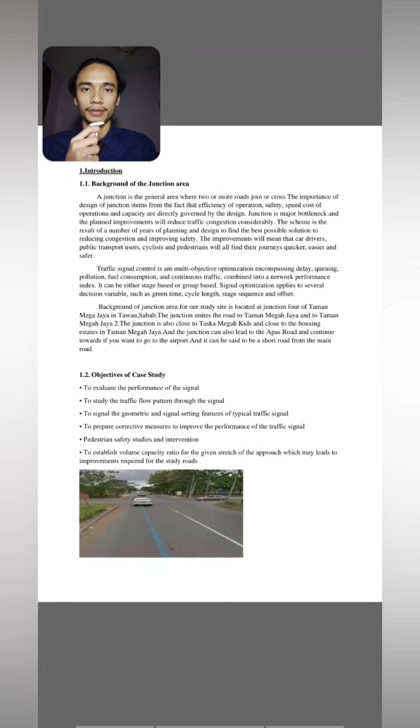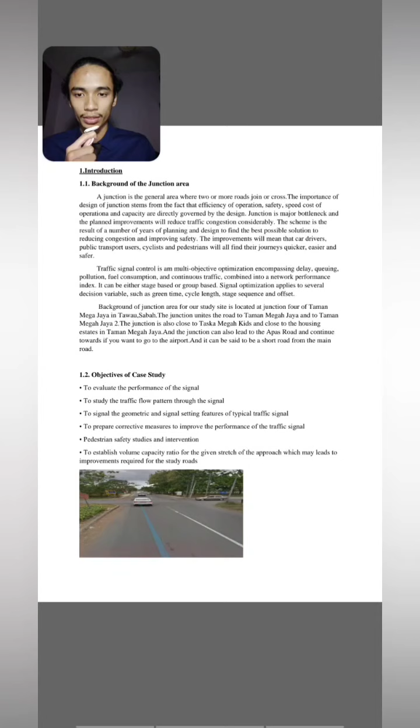Number 1.2, objectives of case study. There are 6 objectives: Number 1, to evaluate the performance of the signal. Number 2, to study the traffic flow pattern through the signal. Number 3, to signal the geometric and signal setting features of typical traffic signal. Number 4, to prepare corrective measures to improve the performance of the traffic signal. Number 5, pedestrian safety studies and intervention. Number 6, to establish volume capacity ratio for the given stretch of the approach which may lead to improvements required for the study roads.

As you can see right here, these are the pictures of the junction area that we chose. We got this picture from Google Maps.

Next, I'll be talking about literature review. Number 2.1, problem facing at the junction. The most common problem that the junction faces is road accidents. The problem faced at our study site, junction 4 of Taman Megah Jaya Tawau, is because the road is too narrow, and this can cause accidents if there is heavy rain and the road becomes slippery.

This causes cars to collide with each other if the driver did not have enough time to press the brake pedal, because the road becomes slippery and too narrow to dodge. So whenever there is heavy rain, due to the road being too narrow, accidents may occur.

Number 2.2, list the factors causing accidents at the study area. There are 5 factors. Number 1, human factors or personal error. Human factors mean it is caused by the human itself or the driver, such as distraction - he or she being distracted by mobile phone while driving, which might cause an accident. Number 2, deficient maintenance - lack of maintenance by the JKR at Tawau.

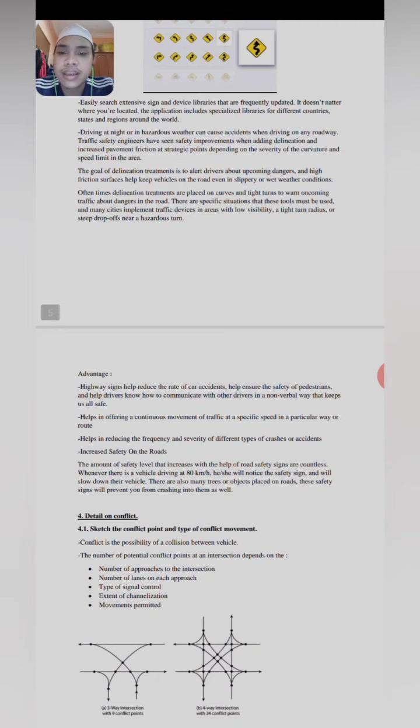The advantage is that highway signs help reduce the rate of car accidents, help ensure the safety of pedestrians, and help drivers communicate with other drivers in a non-verbal way that keeps everyone safe. They help in offering a continuous movement of traffic at a specified speed in a particular route, and help in reducing the frequency and severity of different types of crashes or accidents.

The last point is increased safety on the roads. The amount of safety increases with the help of road safety signs. Whenever a vehicle is driving at 80 km per hour, the driver will notice the safety sign and slow down their vehicle. There are also many trees or objects placed near roads, and this safety sign will prevent drivers from crashing into them as well.

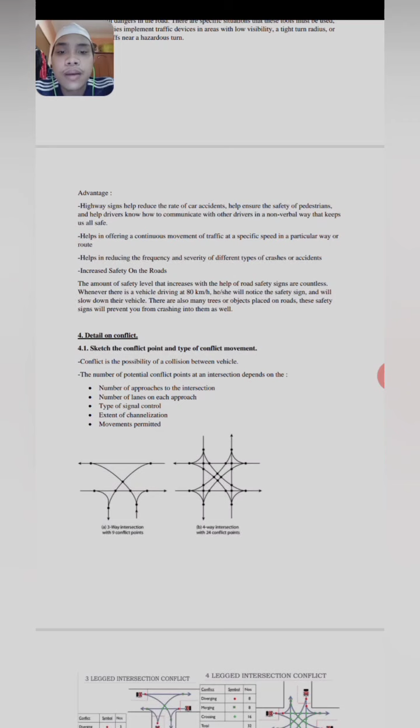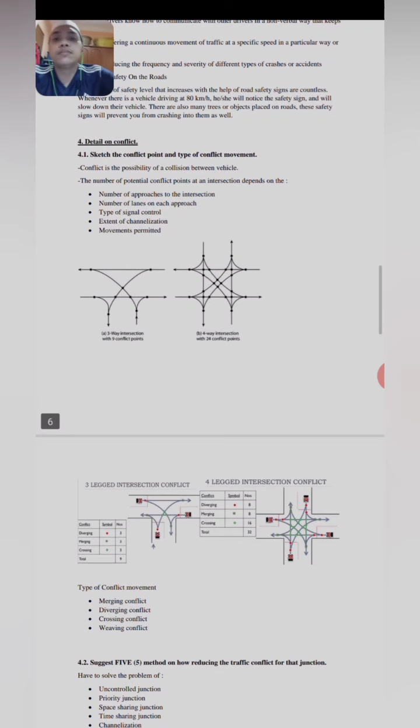Now I will talk about the detail on conflict, number 4.1. Sketch the conflict point and type of conflict movement. Conflict is the possibility of a collision between vehicles.

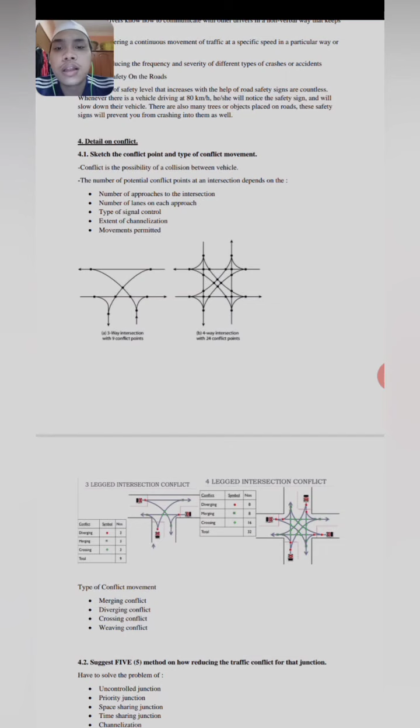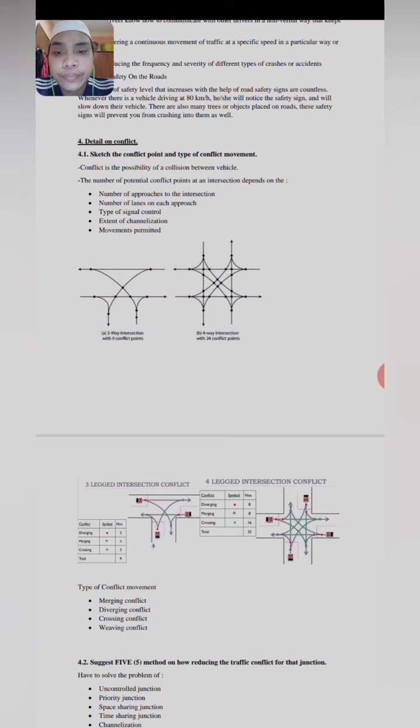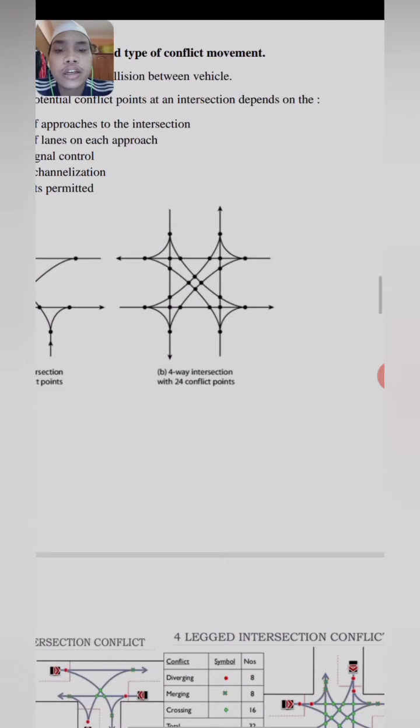The number of potential conflict points at an intersection depends on: 1, number of approaches to the intersection; 2, number of lanes on each approach; 3, type of signal control; 4, extent of channelization; and the last point, movements permitted. You can see in diagram A, a 3-way intersection with 9 conflict points, and in diagram B, a 4-way intersection with 24 conflict points.

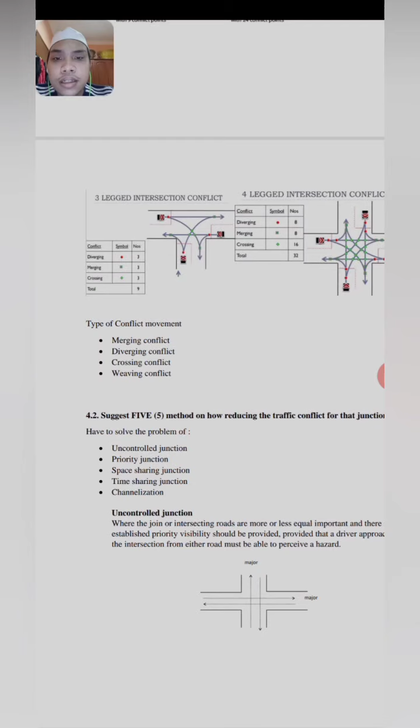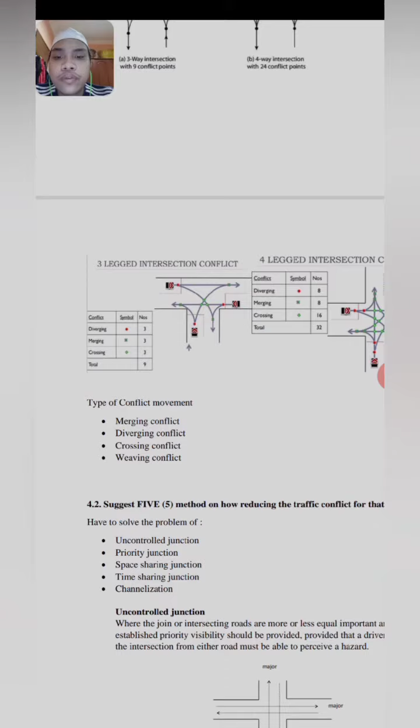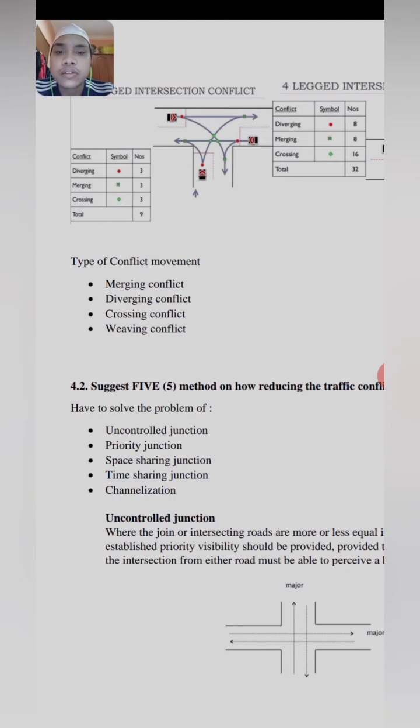You can see the examples here. Now, the types of conflict movement: merging conflict, diverging conflict, crossing conflict, and weaving conflict. These are the 4 types of conflict movement.

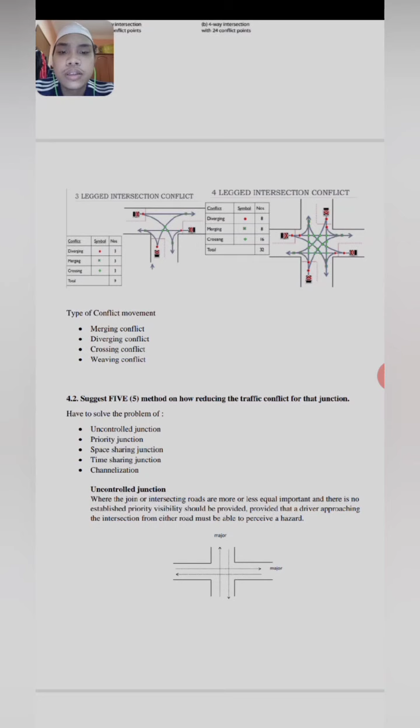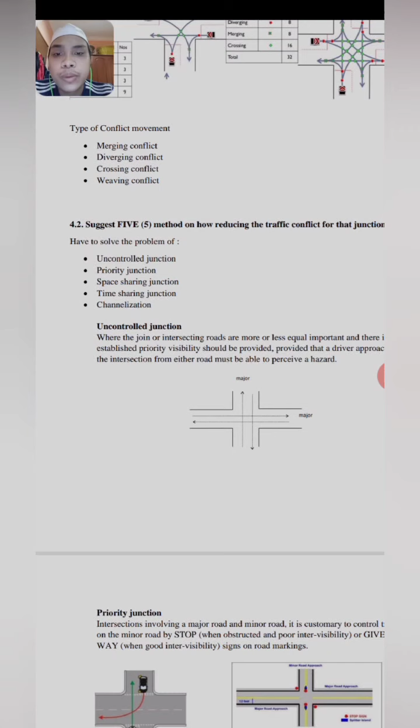4.2. Suggest 5 methods on how to reduce traffic conflict for the junction. We have to solve the problem of: 1, uncontrolled junction; 2, priority junction; 3, space sharing junction; 4, time sharing junction; and the last point, channelization.

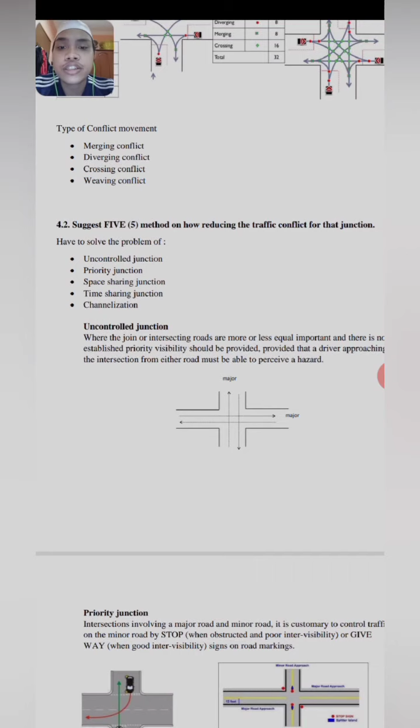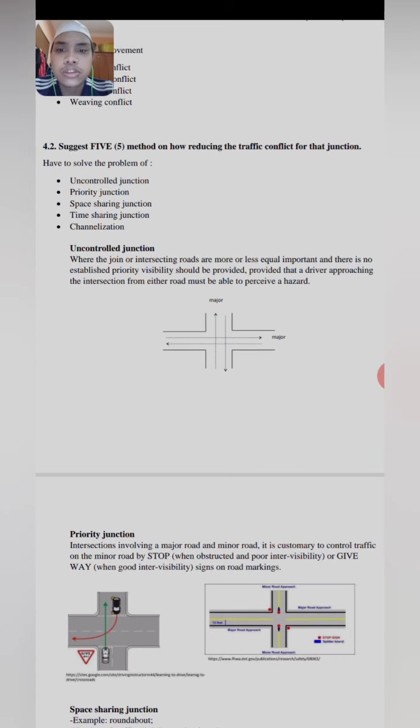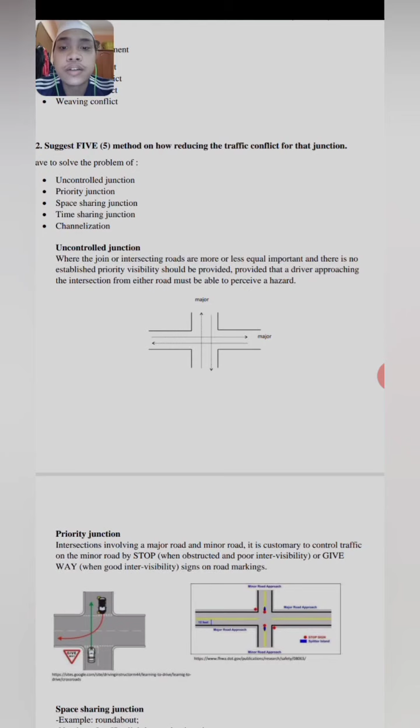Uncontrolled junction is where the joining or intersecting roads are more or less of equal importance and there is no established priority. Visibility should be provided so that a driver approaching the intersection from either road is able to perceive a hazard.

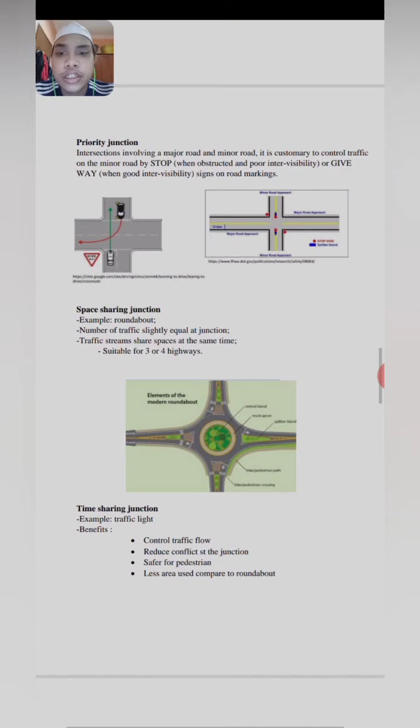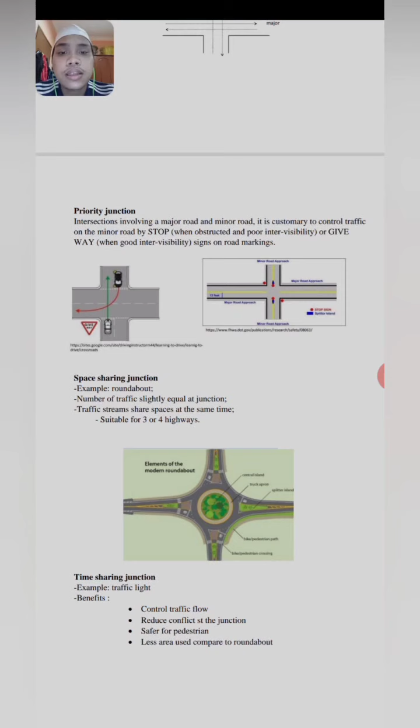Now we'll talk about priority junction. This is an intersection involving a major road and a minor road. It is customary to control traffic on the minor road by stop signs when visibility is obstructed and poor, or give way signs when intervisibility is good, using signs or road markings. These are examples of priority junctions, as you can see in these pictures.

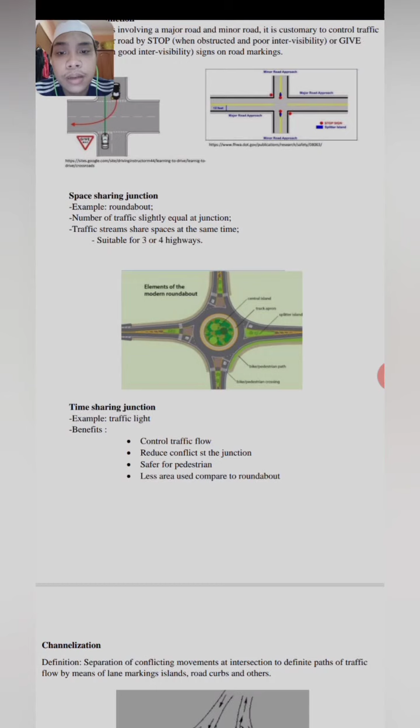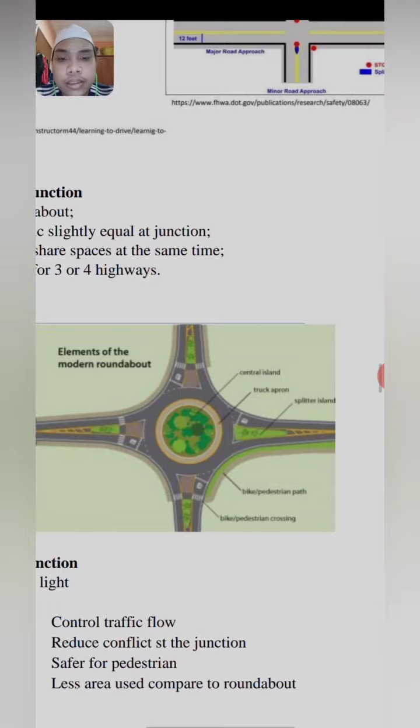Okay, now I will talk about space sharing junction. Example, roundabout. Number of traffic slightly equal at junction. Traffic streams share space at the same time, suitable for 3 or 4 highways. This is the example for the space sharing junction. Example, roundabout. You can see the roundabout has 1, 2, 3, 4 highways.

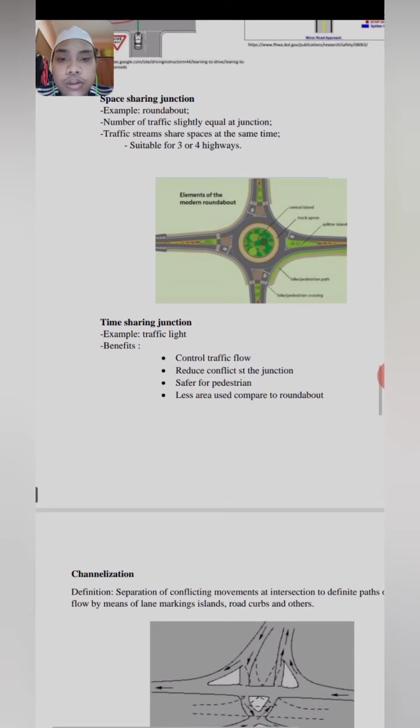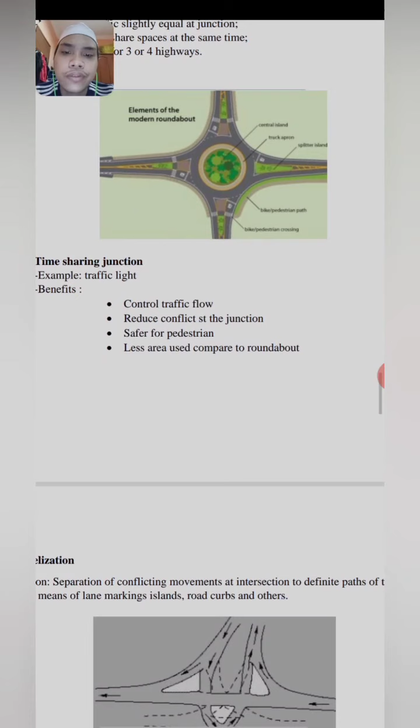Okay, time sharing junction. Example, traffic light. Benefits: control traffic flow, reduce conflict at the junctions, safer for pedestrians, less area used compared to roundabout.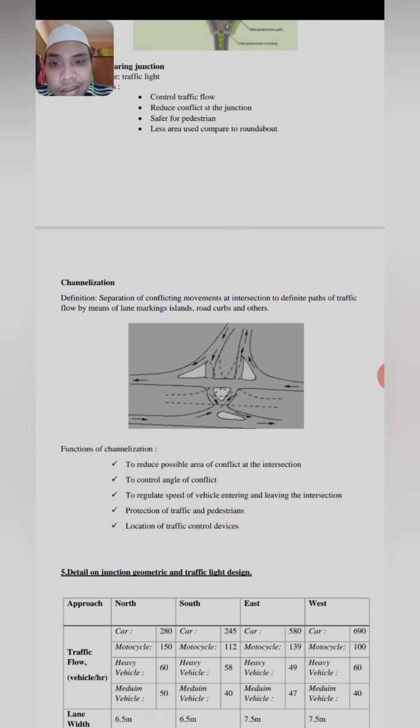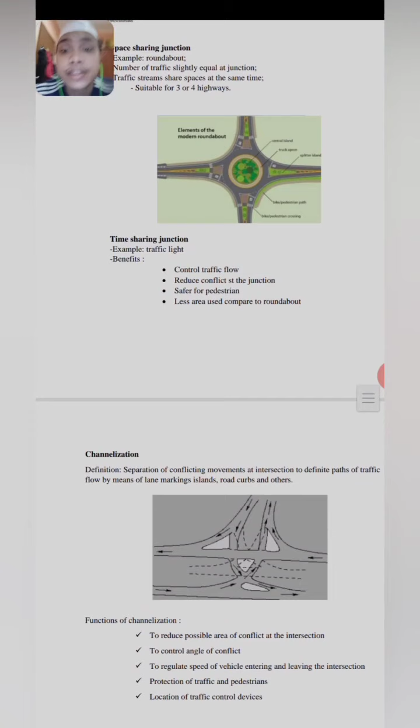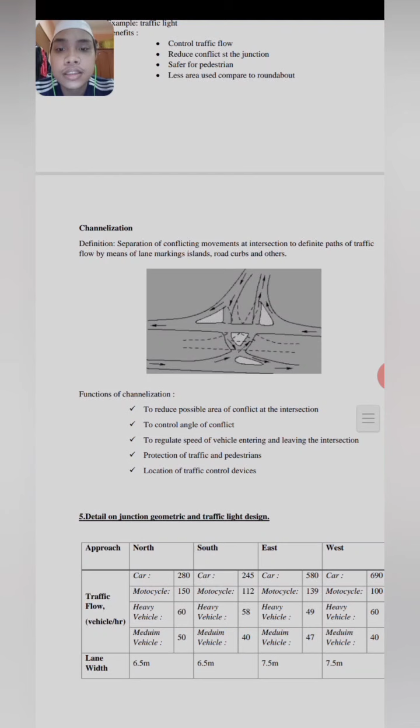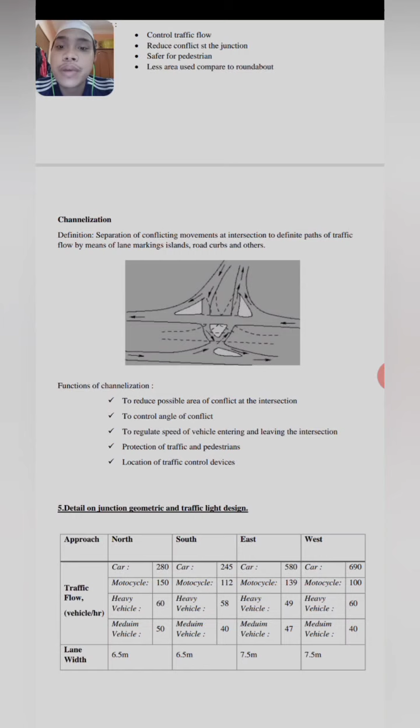And the last, channelization. Oh, I'm sorry, I will talk about the channelization. That is the final part of solving the problem. Channelization. Definition: separation of conflicting movements at an intersection to define paths of traffic flow by means of lane markings, islands, road curbs, and others. This is the example you can see in this picture.

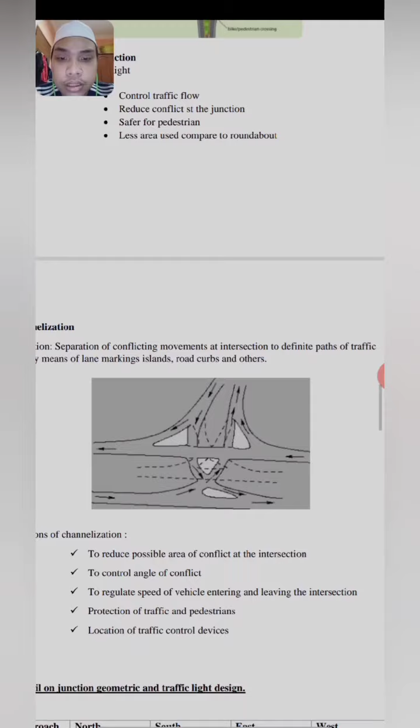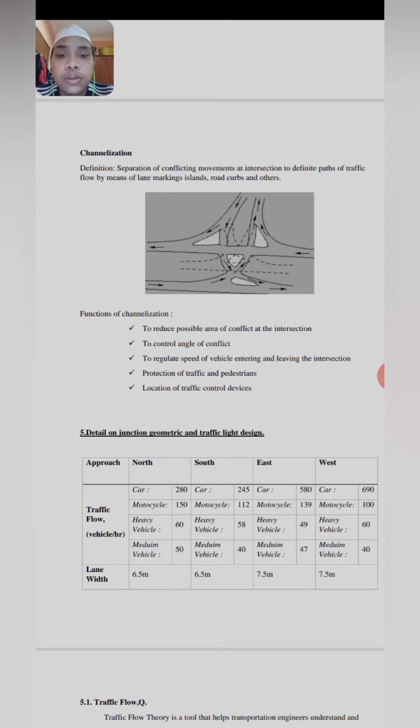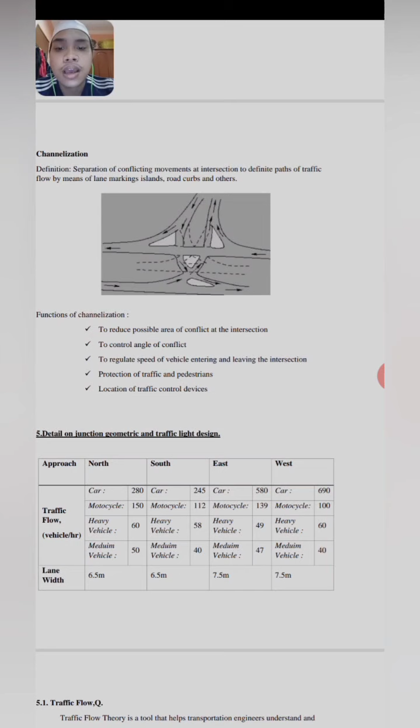Function of channelization: number 1, to reduce possible area of conflict at the intersection. Number 2, to control angle of conflict. Number 3, to regulate speeds of vehicles entering and leaving the intersection. Number 4, protection of traffic and pedestrians. And lastly, location of traffic control device.

Okay, that's it from me, Muhammad Azwan.

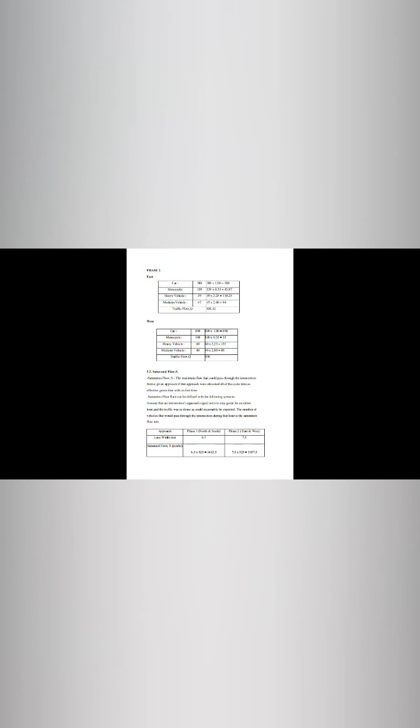Sama juga dengan south, itu juga formula dia dan dapat 492.46. Untuk frasa kedua pula masih sama, tetap sama formula dia, yaitu traffic flow vehicles darab dengan equivalent value in PCUs. So dapatlah untuk east 830.12 dan untuk west 938 for totally traffic flow.

Kita akan masuk pada 5.2, yaitu saturated flow atau dikenal sebagai S dalam singkatan. Saturated flow is a maximum flow that could pass through the intersection from a given approach if the approach were allocated all of the cycle time as effective green time with no lost time.

This saturation flow rate can be defined with the following scenario: assume that an intersection approach signal were to stay green for the entire hour, kita akan stay hijau untuk keseluruhan jam, and the traffic would be as dense as could reasonably be expected. The number of vehicles that would pass through the intersection during that hour is the saturation flow rate. So ini adalah jadual dia.

Lebih senang lah untuk dapat jadual. Approach dia untuk phase 1 north and south. For phase 2 is east and west. Lane width dia 6.5, phase 2 is 7.5.

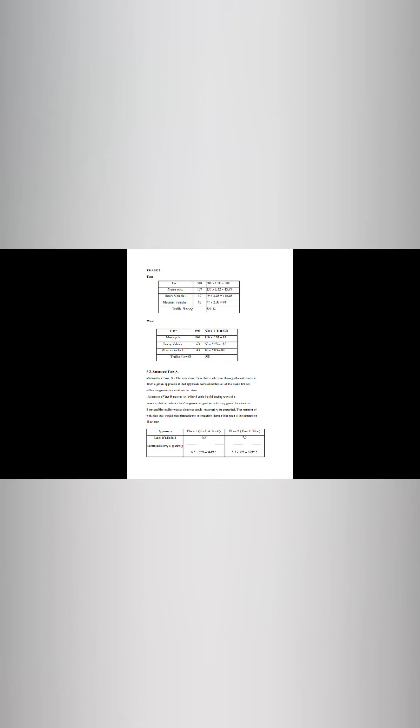Saturated flow dia, untuk dapat nilai dia ialah perlu darab. Kita darab S ni, saturated flow ataupun S ni bersamaan dengan 525 W, iaitu width lane. Jadi kita darab 6.5 darab 525 sama dengan 3412.5 untuk frasa pertama. Untuk frasa kedua pula 7.5 darab 525 dapatlah jumlah dia 3937.5. Itu saja daripada 5.2.

So kita akan beranjak pada 5.3, yaitu occupancy of the intersection, ataupun dikenal sebagai Y. Dia tidak boleh lebih daripada 0.85. Kalau mau lebih daripada 0.85, digalakkan ataupun dicadangkan untuk lebih upgrade dan sebagainya. So inilah jadual dia, phase 1 dan phase 2 approach sama juga.

Dan occupancy of the intersection, this is the formula dia. Occupancy of the intersection atau disebut yi, yaitu the highest y value from the approach within the phase 1, nilai paling tinggi berdekatan dengan phase pertama. So formula dia ialah

total traffic flow keseluruhan dia dibahagikan dengan saturated flow keseluruhan. Untuk north bahagi dapatlah 0.17, untuk south dapat 0.14, east pula dapat 0.21, dan west dapat 0.24.

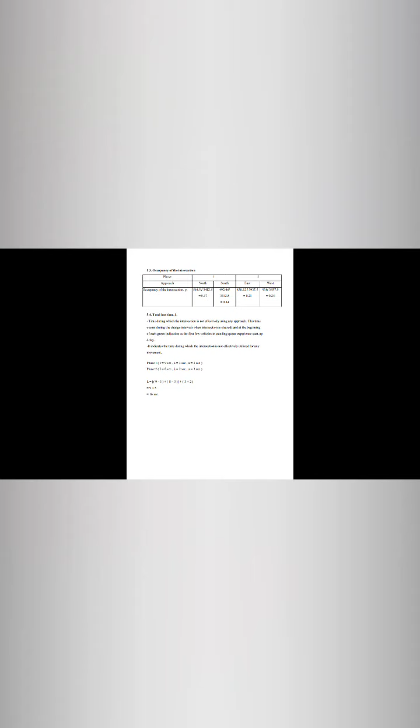So kita akan masuk dalam nombor 6, that is design the traffic light based on the data above. So ini adalah mereka bentuk traffic light base lah. Dan data tersebut dapat daripada raw data yang pada nombor 5 tadi.